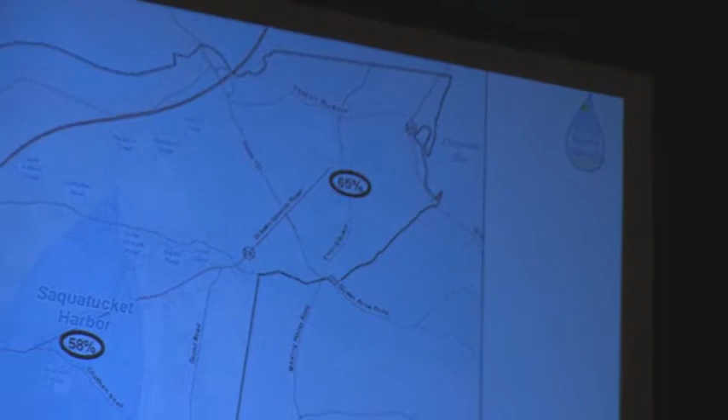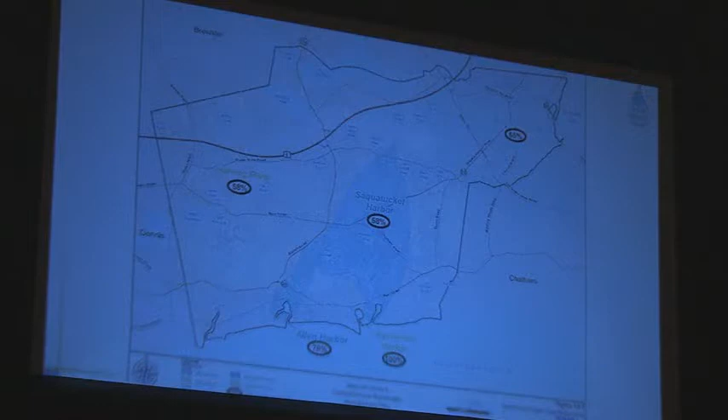I know at one of the homes I was in, I had a gentleman say to me, well, why are we doing this? Simply, we're doing this - putting the sewers in, by connecting into a sewer, the sewer facility in Chatham has the ability to remove as much nitrogen as needed to get us into compliance. So in a nutshell, we're doing the sewers in order to get to the level of compliance we need to protect the environment.

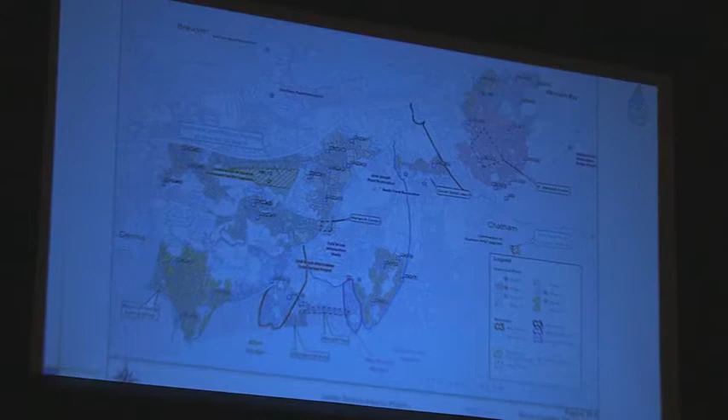But just to give you a flavor for the percentages we're dealing with, the next one is actually 8 phases over each 5 years, so it's 40 years in total. This is phase 2 in East Harwich. Phase 3 will also be in East Harwich.

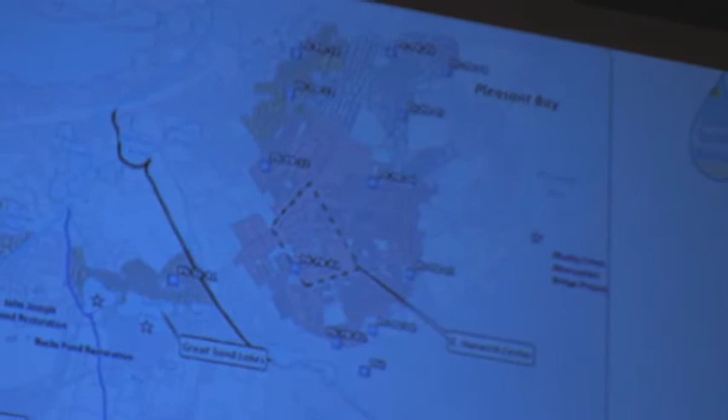This is the southern section of Pleasant Bay. In terms of materials we've passed out in the past, we have these maps, so if your property is on there, or if you're not sure about your property, please come see us, preferably one of the engineers, and we can make sure you know whether you are in the program or not. We did one of these presentations about 3 or 4 months ago, and a lady found out she wasn't in the program, so she left. I get it, we don't take any offense at that. Sometimes that happens.

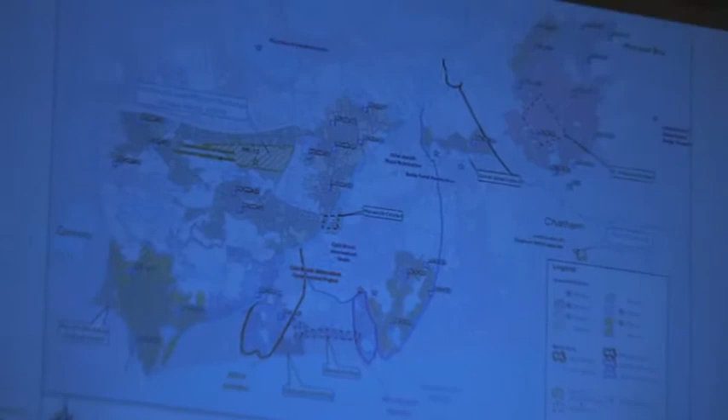This is the more detailed view of the area. The purple on the bottom is really Phase 2. I've said to people that as we do the designs on these, things are changing, so what you've seen in the past is more of a representation - this is much more specific. There are 650 properties included in this, shown on the screen. We do have materials with the maps and the list of properties, so again, if you're not sure, we have it.

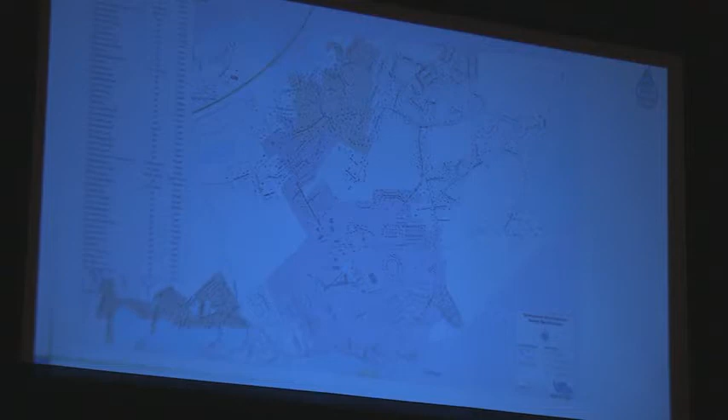Phase 3, which I was working on in the capital plan just the other night, is coming not that far off - 3 or 4 years. So we will be back to Phase 3. Phase 3 is next, and that is the central part of East Harwich as opposed to the southern section.

Just on the schedule, to remind folks, we've come a long way. Obviously we're already on to Phase 2 of the overall program. Town meeting had a construction vote on May 7th of 2018, and the town-wide ballot - thank you very much.

In order to get these projects done, we do need to do it as a debt exclusion. Just to remind folks, the debt exclusion only stays on for the length of the borrowing - once the borrowing is done, that falls off. That's an important concept because we're trying to make it cost-effective for people in the community.

To remind people on the cost elements, this year it will be about $150 to the average homeowner with a home of $350,000. That goes up, peaking at $650, and averages out over 70 years at $400. So $400 is generally what you'd see as part of your tax obligation on this component.

What we're gearing up for - one of the assumptions we made was that the borrowing would be at 2% through the State Revolving Loan Fund. It's basically a state bank, a good way to visualize it, but specifically targeted for water and wastewater. We are first on the list because we are addressing nitrogen and phosphorus issues, mostly nitrogen, and we are a regional effort - we're coordinating with the town of Chatham, so we're considered a regional application. That means we assumed it would be 2%, but there's a strong possibility it could be 0%, and they're even talking about loan forgiveness money. So being first in line, first in this process, will probably yield some benefits.

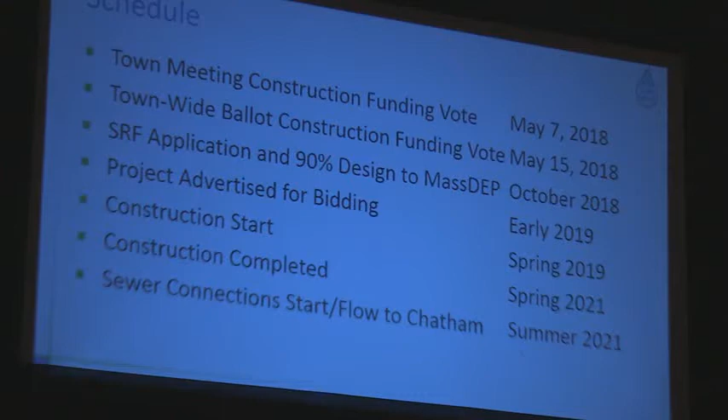We do hope that once we have the SRF application in and reach 90% design, we're getting close. We need to have that material into the state so they can do the review. We still have to be approved for the project, approved for what we're doing. You can see some of the boring work being done out there now - they're actually digging holes in the ground to get a profile of what's underneath the roadway.

What does it look like, so they know where to put the pipes? I think that's an important concept because we have engineering designs that talk about what it's going to look like and where the pipe's going to locate. Once they actually put the pipes in the ground, you'll have a more definitive answer. So the plan may say the pipe's 9 feet down, but when it's actually put in the ground it may be 9.5 or 10 feet. It's going to move a little bit.

So the plans you have are still going to be conceptual, really up until the point the work is actually done. Then when the as-built drawings are completed, we'll get the appropriate elevations, and that will be significant as we move on.

For folks, we hope to advertise the project in early 2019, with construction starting optimistically in spring of '19. One thing about working on Cape Cod, having been here for a little while now, is that usually in every other part of the state you do a lot of work in the summer.

On Cape Cod, we really don't do much work at all, just because of the tourist season. As administrator, to try to get the natural gas people out of the way, we've done some side streets to kind of keep them working so we don't tear up the roads too long. So there may be work done in certain sections so we can get the overall project moving in a timely fashion. The goal is to have the construction complete over those construction seasons.

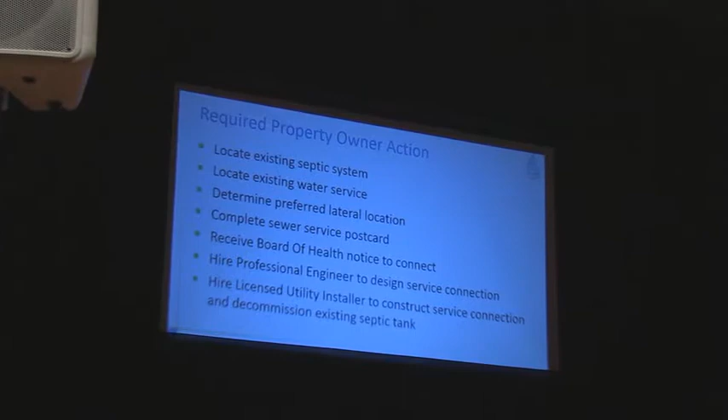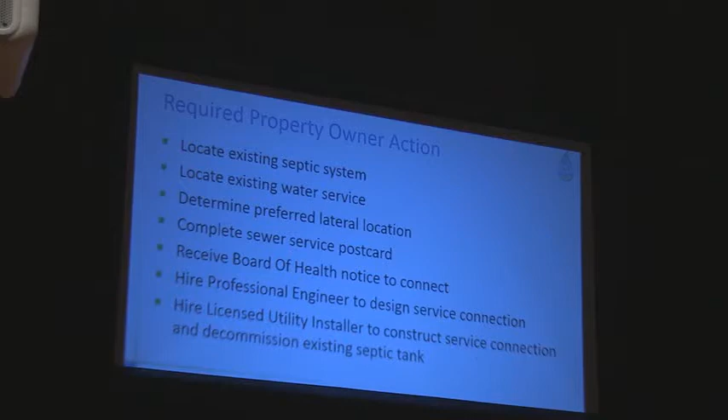The property owner requirements — what we're saying here, and we are going to have a presentation on this to walk through — is that you want to make sure you locate your existing septic system. You also want to locate your existing water service.

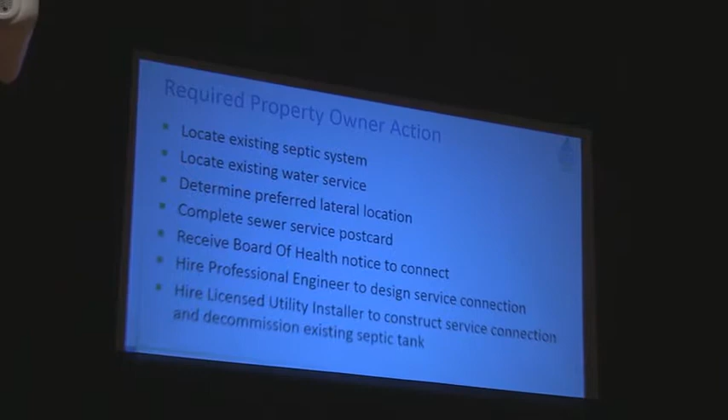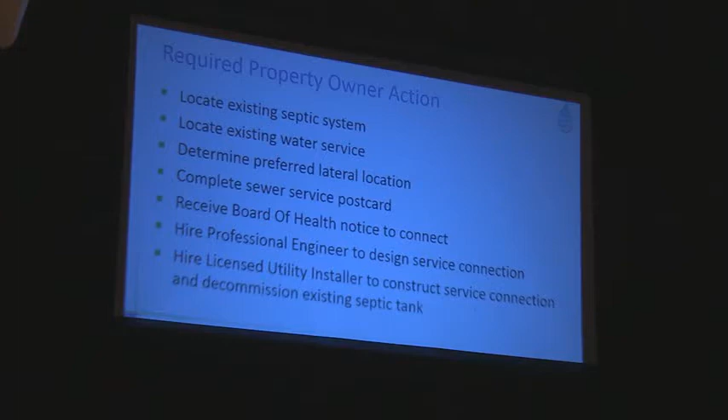I have had recent discussions with my conservation administrator. I would recommend that, depending upon where your current piping is, if you have wetlands on your property or close by to where your septic system is, you may have to go to the Conservation Commission as well. We are going to try to have the conservation administrator make some of those decisions, hopefully the vast majority.

But if the piping is going to go close to wetlands, there may be some additional regulatory approval that's needed. We are trying to streamline that process to the best of our ability, but there are going to be some cases where if you are close to wetlands and want to relocate your pipe close to those wetlands, additional approval is going to have to be obtained.

In terms of determining the preferred location, once you have all that information, you should be able to come up with a preferred lateral location. Just for terminology, the lateral is basically this: the town will put a pipe in the street, and we'll have what's called a lateral, a small pipe off of that. You would tell us approximately where you want that on your property or adjacent to it, so that if you know where your pipe is coming out, we can match it up.

The thing we don't want to have happen is to put a lateral in and have you change your plans and not be able to connect up in a straight shot, because that's going to cost you more money to run it an additional distance.

We will send out, and we would ask for, a complete sewer service postcard. As you get these requests, you'll most likely see the CDM logo on there. It will be a postcard that says we're going to come down your street, we want to talk to you about the location of the lateral. Do not throw the postcard away — this is one of those things. It's not junk mail. You want to keep that because it's important.

What that will do is generate a discussion between yourself and one of the engineering firm folks, who will come out and actually talk to you about where the lateral needs to go in your property, adjacent to your property. That's a key component, be it just a little simple postcard.

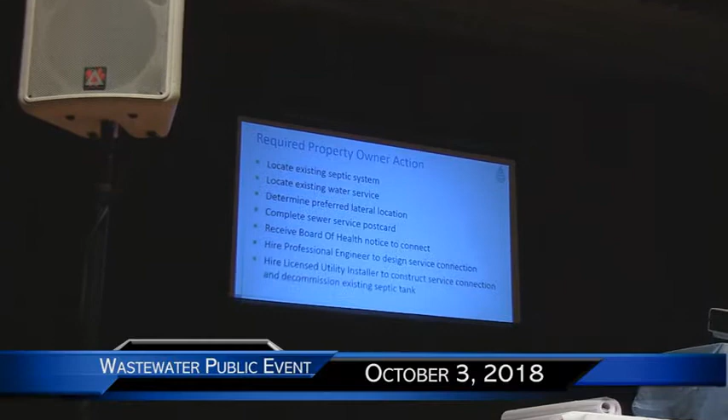So that's when you actually need to do the physical connection. But you won't get that till 2021. And under here, just for required property owner actions, at that point you could hire a professional engineer to design the service connection, and on the engineers, I think we have a listing at the health department of people who commonly design or do septic systems in the town of Harwich.

So we're not recommending anyone. All we're telling you is these are people that commonly have interactions with the health department that are familiar with Title V systems. I think it's probably a safe way to say that. And then you hire the licensed utility installer to construct. We will, through the Board of Health, put together a list of licensed utility installers.

If you want to get a sense for what that list may look like, the town of Chatham has 7 or 8 on their list now. We probably will start with their list as a place to start. So if you are dying to get a sense of who's in the marketplace, you could use the Chatham list, and the Board of Health will request to adopt a formal list of who is a licensed utility installer prior to the need to have a service done.

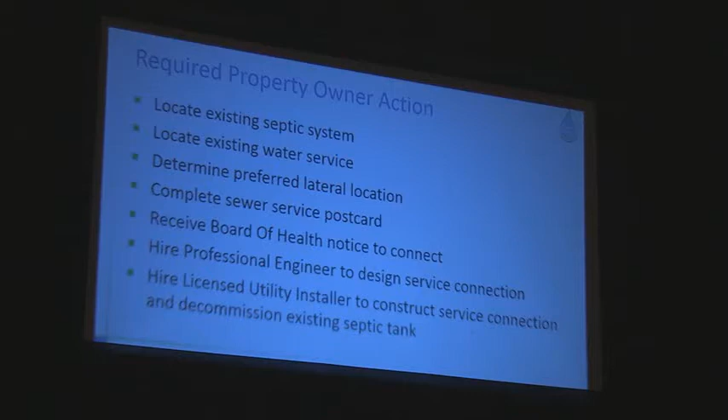And then just the resources available. We have obviously a lot of information on the town website. We wouldn't mind some feedback, we're trying to make that website as user-friendly as possible, so any suggestions are always welcome. Town staff, I know I personally have met with a fair number of people.

I've already introduced Dan and Megan, who have also met with people, so if you have questions or want one-on-one help because you have a specific concern, please take advantage of that.

I've introduced a few members of the Wastewater Support Committee. The committee meets twice a month, one in the evening and one during the morning on Tuesdays. The first Tuesday is the morning session, and the fourth Tuesday is the evening session, generally at 6 o'clock.

We also have email, so if people want to use that as a central way to get questions in about anything, go onto the website under the Wastewater Support Committee and you can send them an email.

On the septic system as-builts, we have those online. I think we're going to do a demonstration on that, so I'll leave that for the demonstration. We also have the topographic survey available for folks.

With that, hopefully not confusing you too much, I'd like to invite Dan and Megan up to do the pieces on the relevant question of how we actually do this.

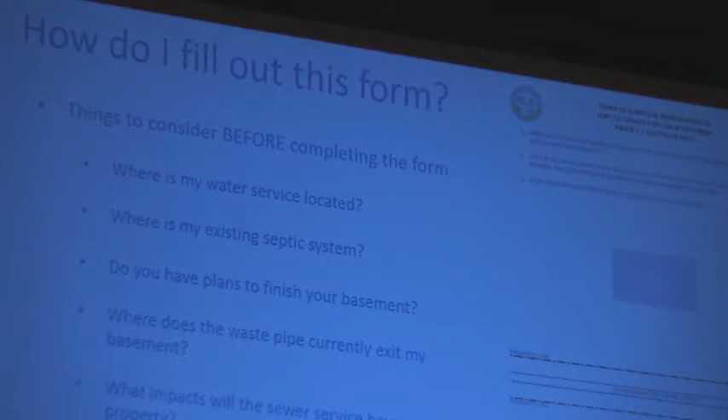Dan will go over water service information, and after we show you all of those things, we can talk about what you're going to do if you want to finish your basement or have a driveway, which way do you go with this. So we'll actually walk through how to look at your septic plan, your water tie, and help you fill out the form.

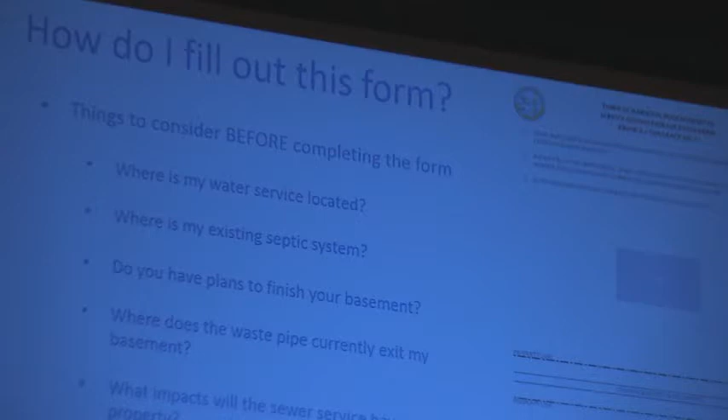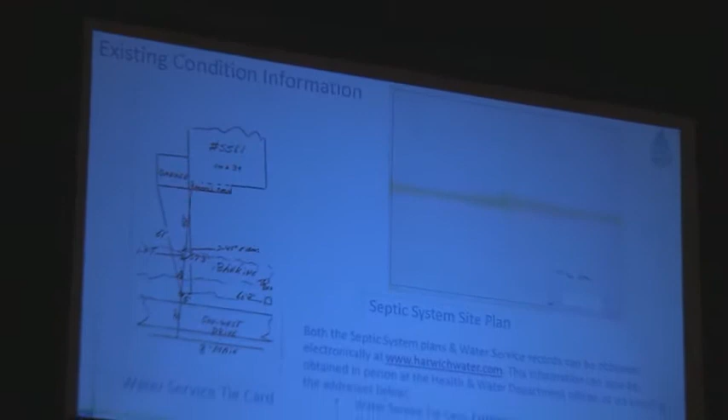Site plans and tie cards are now located at the Harwich Water website. It's on the Wastewater Support Committee site, linked directly to it. It's on the health site, directly linked. It's on the water site, directly linked. You can get them electronically.

These site plans are available for any property that the health department has a file for that's been scanned and uploaded. Larry, I don't know what to say - your file's not in there, not in our records anywhere. So there are a handful of records that we don't have anything for.

In that case, you don't have to hire an engineer to find and locate your existing septic system. What we can do is walk you through how to find your sewer line in your basement, and it will give you a sense of where your septic system is.

If your sewer line is going out your basement in the back of the foundation, you know your system is beyond that. If it's going out the front, you know your system's in the front. Beyond that information, you don't really need to know much more at this point. When you do go to that next step of hiring the engineer to connect the lateral, they'll be able to find that information out, so your utility installer will know where to abandon a tank or cesspool.

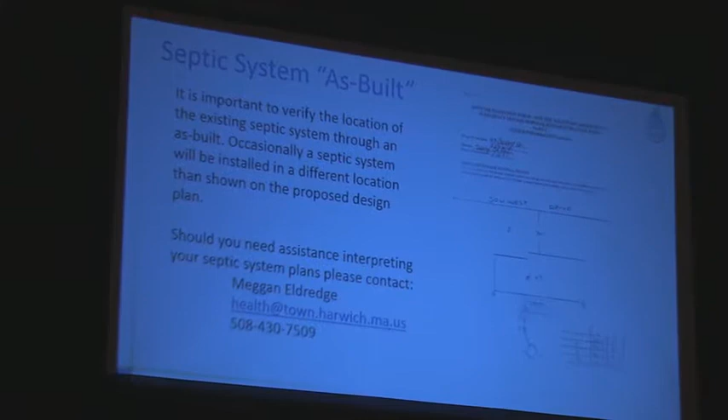A septic system as-built is a little different than a site plan. A site plan has your property lines, your house, and sometimes shows a proposed water line, driveways, even some get detailed enough to show trees. But the septic system as-built is a basic drawing that your installer gave us when they installed the septic system.

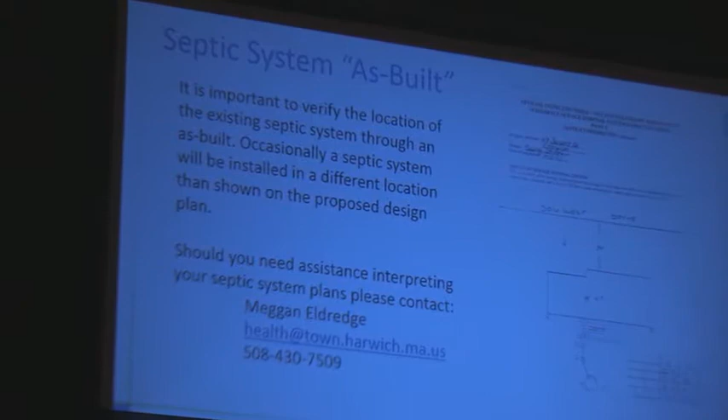And it has swing ties, and a lot of people don't know what swing ties are. If you look at this as-built, it's hard to see up there, but it's on page 18.

We use 47 Southwest Drive, and I know that person's here, so lucky you. Does that mean I connect for nothing? Yes.

So if you look at this drawing, you'll see Southwest Drive at the top of the page, so you're looking at the septic system in the back of the house, and there's a little tiny A and a little tiny B at the corners.

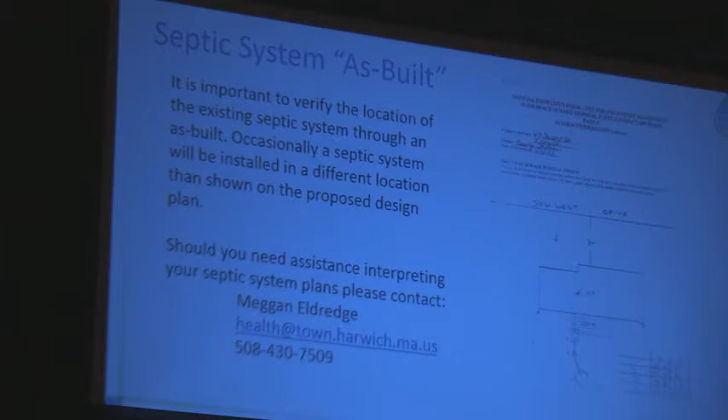And then you'll see a deck in a rectangle with a 1 and a 2. So what a swing tie means is where one tape measure reaches from A to point 1 and B to point 1, and that's the measurement given in the little table.

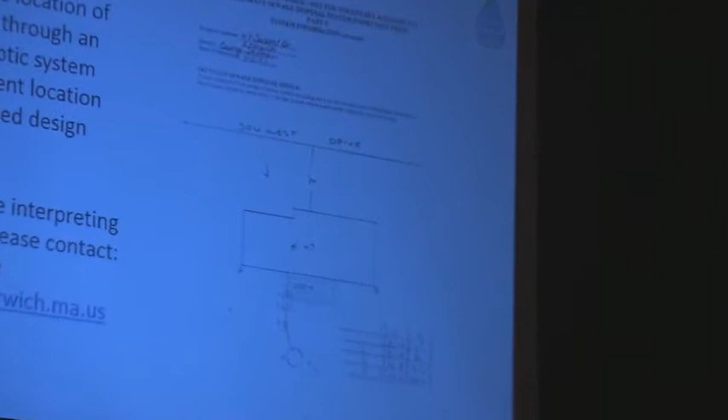What's important to see is sometimes an as-built is a little different than your actual site plan. Especially pre-1980, a lot of times an installer would get in your backyard and say, there's a giant tree over here where the engineer wanted to put your septic system, so we're going to put it on the other side instead.

So it's important not only to look at your site plan, but mostly to look at your as-built. A lot of site plans are going to look like this, but a lot of them are much more basic, and some are a lot more clear. So they vary from hard to read to crystal clear.

What you're looking for when you see your site plan is where your house is in relation to the road and where your septic system is in relation to your house. That information is going to help you decide which side of the house to go out with your lateral. Do you have a deck? Do you have all of these other things that are going to get in the way of the fastest and easiest way for your lateral to connect?

And Dan gets to talk about water service size.

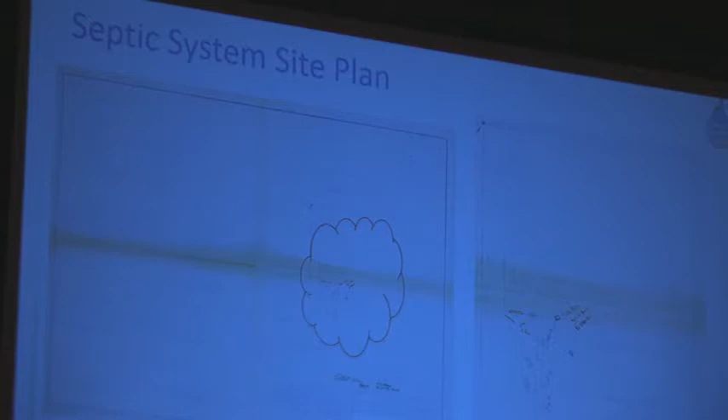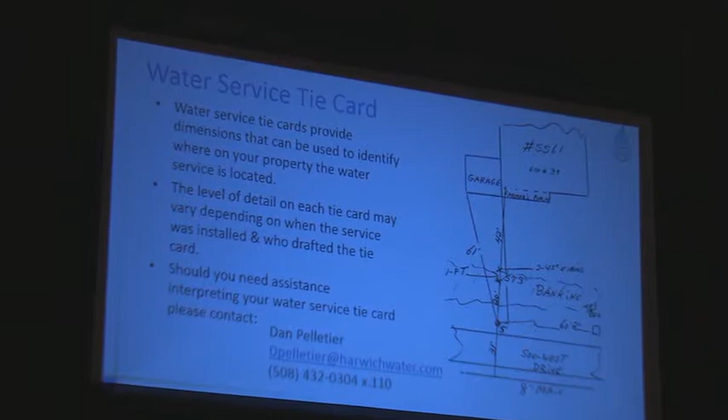So we're going to go through water service ties, and I have a number of examples at the end of this as to what your water service tie card may look like. There's a good chance that it was formed on the outside of your property next to a trench on the back of a pickup truck.

Nowadays, we do them all in AutoCAD, so you know they're crystal clear. So we're going to go through an example here of 47 Southwest, and you can see on the picture that there's a lot of lines and numbers, right? What I want to do tonight is try to provide the know-how to understand what we're looking at. So I guess we'll move on to the next slide.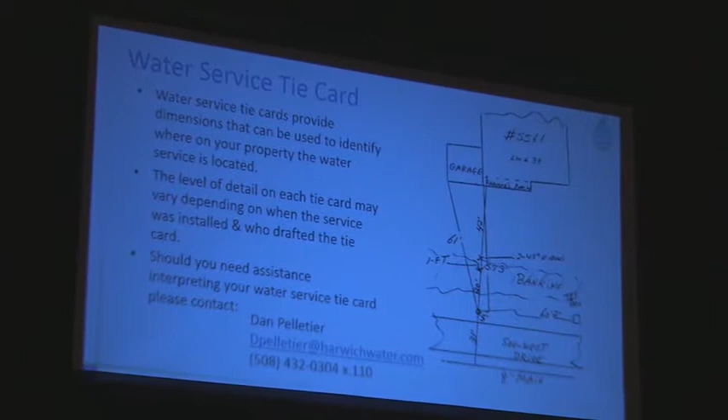And first, I apologize. First, let's find out how to get it if you don't have it already. So we have uploaded, as Megan said, all of the water tie cards and all of the sewer or septic system as-built and plans, and they're all available electronically on the water department's website.

So if you go to the harwichwater.com homepage, what's circled in that little bubble right there says Department News Plans for Phase 2. And there's a link for water plans and there's a link for sewer plans. They both take you through essentially the same process, but we're going to go through both so that you can see it, and hopefully it'll sink in, you can take it with you.

So on the next slide, right next to that red arrow is step 1. Step 1 says to find your water account number. That's going to take you to the spreadsheet on the right, which is going to have all of your addresses. It's all alphabetical by street name and number, and you're going to get your 5-digit water account number.

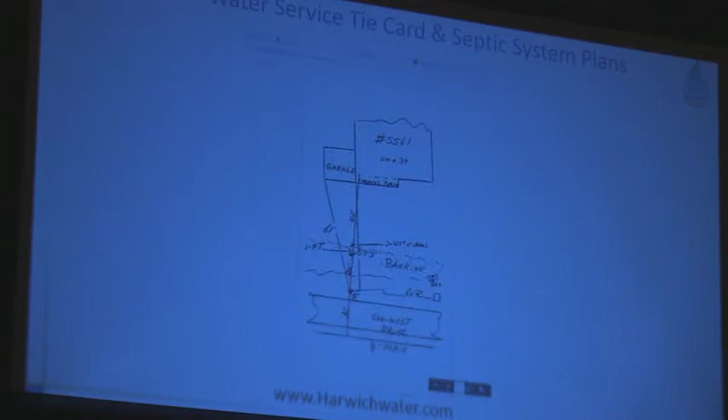You are then going to go back to the previous page and click next — I'm sorry, you're going to go forward. And then the link just below that is step 2. Step 2 is going to link you to the web page on the right, and you're going to scroll down and find that 5-digit account number, at which point you will click that, and it will pull up your service tie card. At that point, you can then print that, leave it online, do whatever you'd like with it.

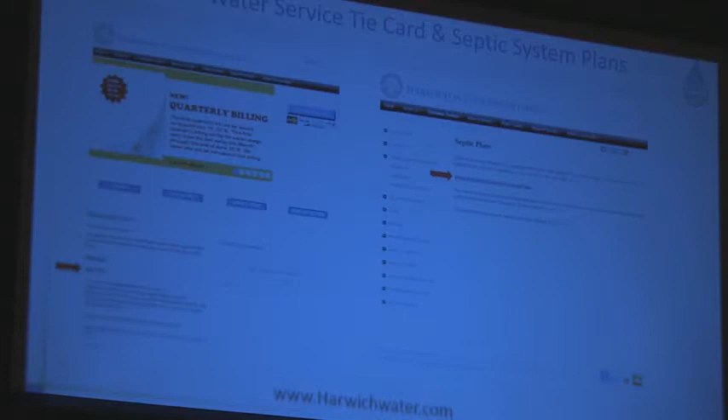Moving on to the next slide, we're going to go through the same kind of process with obtaining your septic plan.

So again, you're going to click the septic plans link. It's going to link you to another page, and you're going to click the following link on the right with the arrows, so hopefully you can take this document with you and guide yourself through the process at home.

And this is assembled by address. So in this instance, you will be looking for just your property address. Again, it will pull you to the as-built or the septic plan, and you can save that, print that, do with it what you'd like.

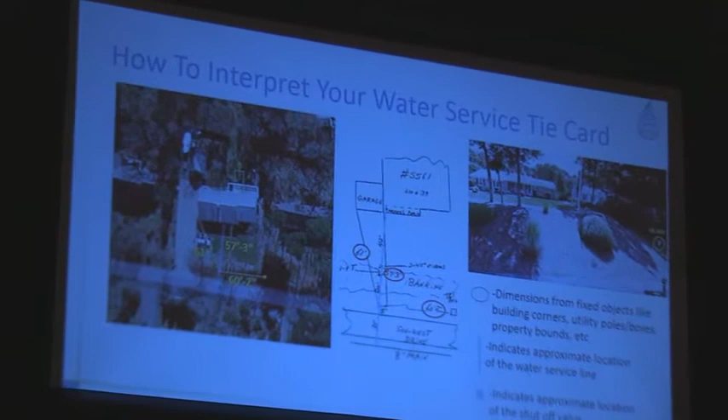So to the next step, we have our ties, we have our septic plan, we have our water tie. Now, what are we going to do with it? This slide goes through how to interpret your water tie card, because as I mentioned earlier, they were likely done on the back of a pickup truck, and there's a lot of lines and a lot of numbers. Some of them are much clearer, but the one for the demonstration tonight was a little bit complicated. I think that's a good thing, so we're giving you a real situation.

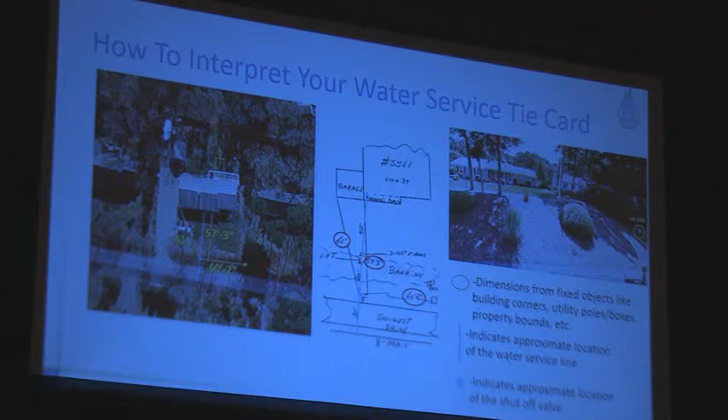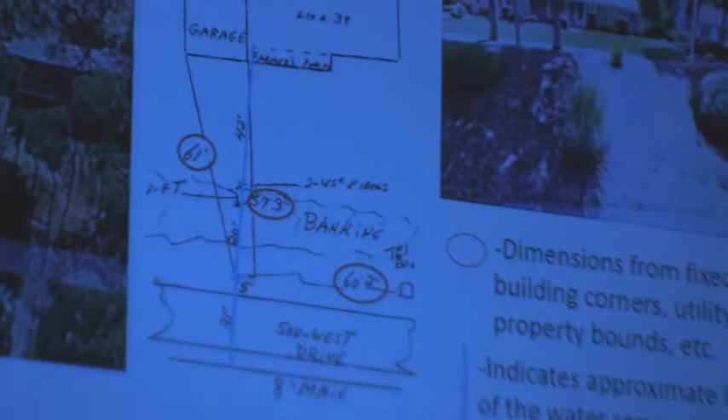So what I did with the image in the middle was highlight the water line in blue. And the dimensions circled in red are the dimensions that you can pull with a tape from the corner of your house to locate where the curb stop is on your property. The curb stop is the shutoff valve at your property line. You can use these tie cards to locate that service box in the front of your property, and from there you can make sure your sewer stub is going to be 10 feet or beyond that pipe.

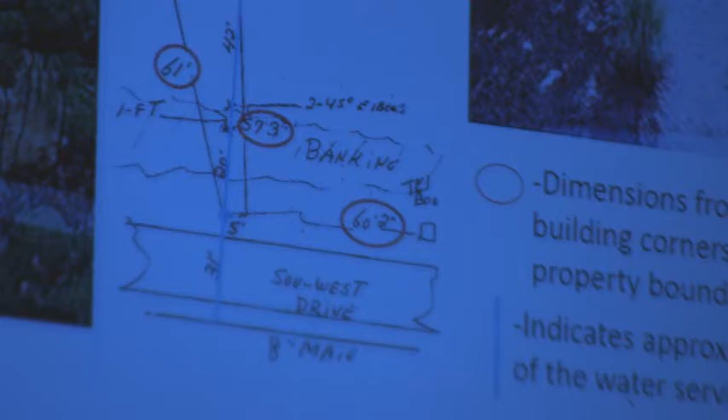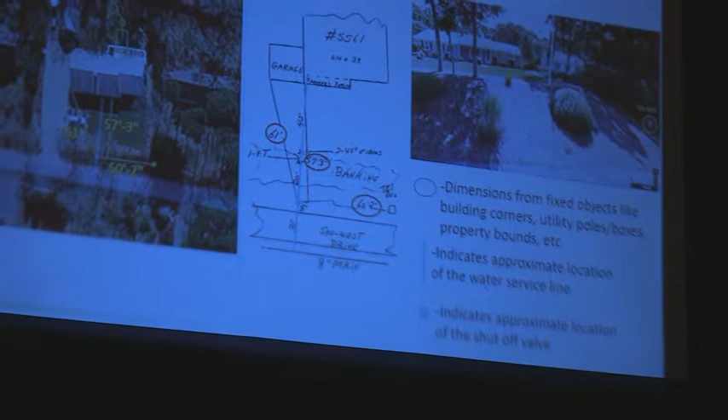For this property, I also took that and we put the water service as well as the septic. It's kind of difficult to see there using Google Earth, just so you could see what it would look like in real life. If you look at the dimension on the bottom right, that 60 feet 2 inches, you can see it's right next to a little square box. It says TEL box, which is a telephone box.

So I actually went and took a Google Street View of that home, and you can see circled in yellow on the right image is the telephone box. So if you get the service tie and look at your property, you say okay, that's the telephone box. Or a lot of times they'll use a catch basin or a telephone pole, and they generally write the pole number on the tie card. So when you download your tie cards, you can look at that. Some of it may be as easy as just pulling from the corners of the house, but sometimes they used other landmarks.

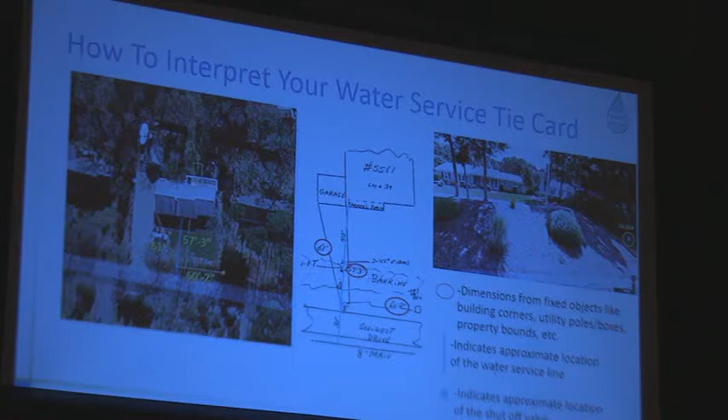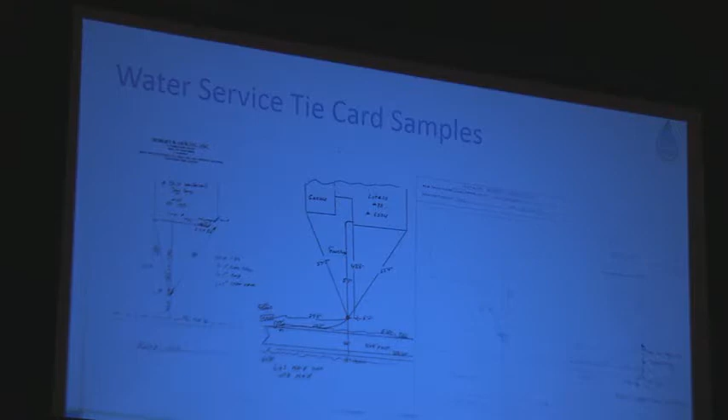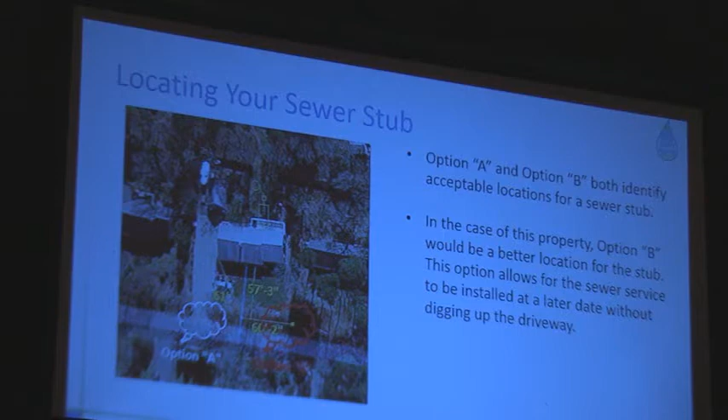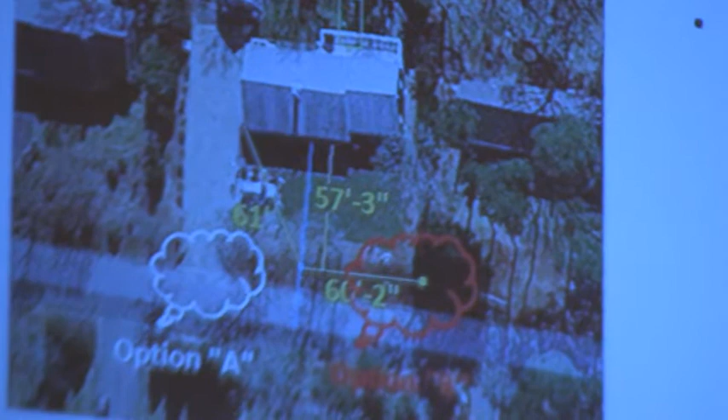But now going into how are we going to locate, how are we going to use this information to locate where we want our stub. If you look at the information we gathered from the plan, we know our septic system is in the back and the water service is going down the front center of the property. Now option A and option B would both work, but option B is much more lucrative. It would not require restoring the driveway, it wouldn't require trenching between that tight space between the garage and the house, and putting it in option B allows the homeowner to come to the right side of the house and down a mulched flower bed and not disrupt their lawn.

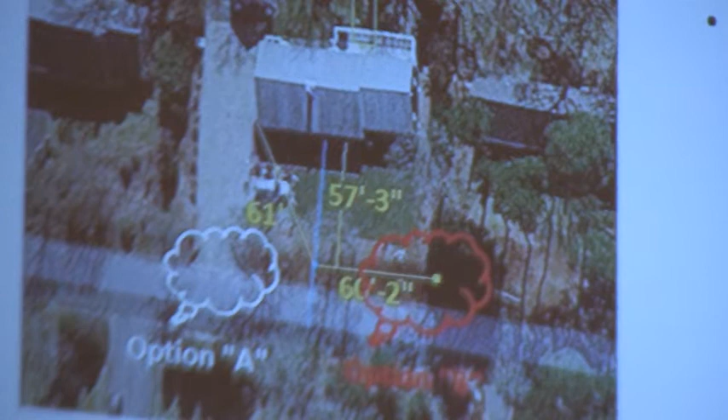So looking at this information, you can see at this point in time, all you're doing is trying to identify where in your frontage is going to provide the least impact when you go to do the actual connection from your home to the street. So that's kind of a quick walkthrough of this property, and the lucky winner here tonight.

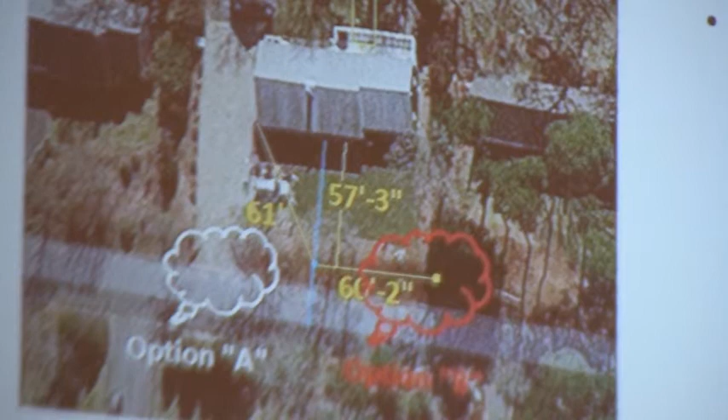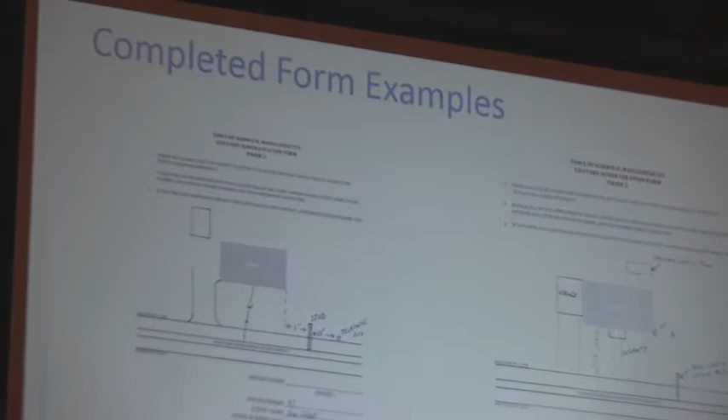That wasn't planned, but the next slide is actually what these completed forms should look like. So the form on the left is what I drafted for the property at Southwest that we just went through. You can see it's a very generic drawing, there's a square and a street.

What they're looking for you to do is just identify where on the frontage with some way to identify where that stub should get placed. So this image on the left, you can see I drew that telephone box back in, and I put a dimension 15 feet off of that telephone box. Now, keep in mind, the dimension to the water line was 60 feet, so we far exceed our 10-foot minimum. We're going to be on the edge of the property, and it's going to be able to go up the mulch bed and connect right into the back. And you have a completed sewer service connection form. Another example was one that we did for another presentation on the right.

Again, the dimension that we provided there was, it's difficult to see because of the projector, but it's 10 feet off of the right side of that home. So just some dimensions or some indication if you have trees.

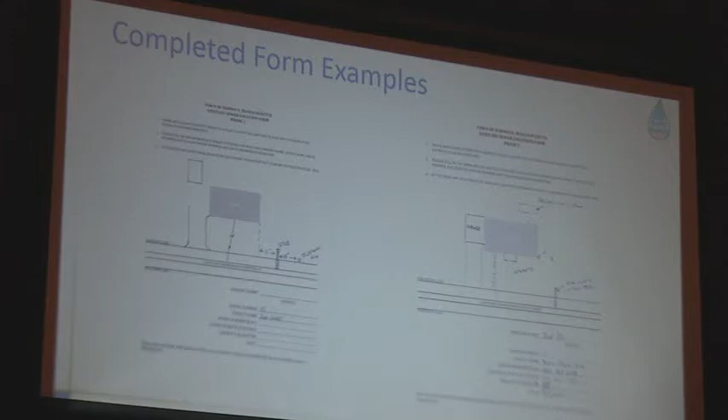I went out to a home today and assisted a woman with locating her water service and providing some direction that would have the least impact on her property for where to put the sewer stub. She has very large pine trees along the front of the road, so one way we identified the location was, here's the water service box, we have two big pine trees, and I want it right in the middle between those trees.

It can be, I believe, correct me if I'm wrong Dave, as simple as saying we need it at this point, show me the driveway, show me what's on your property. It doesn't have to be an engineered plan at this point, it doesn't have to be anything more than that. So, do we not have to hire a civil engineer, or can we hire a civil engineer?

At this point in time, you do not have to hire one. The question was whether we have to hire an engineer to perform this function. You do not need to hire an engineer to complete this form.

When you receive the order to hook up from the Board of Health is the point where you would need to consult with an engineer to design the connection from the end of that pipe into your home. So if your septic's in the back at a lower grade, what you need is, you just can't... how do you determine if you're going to need to?

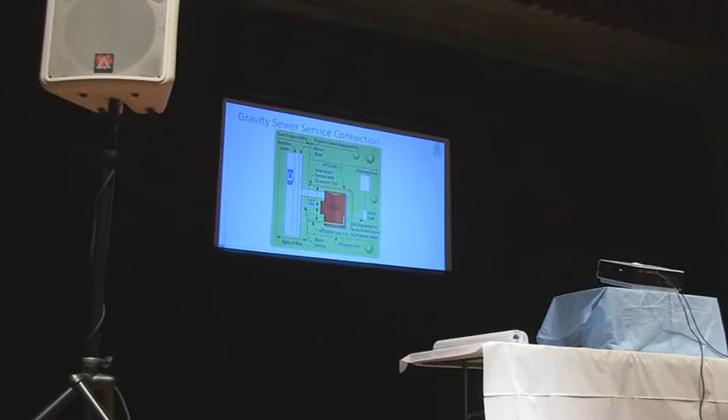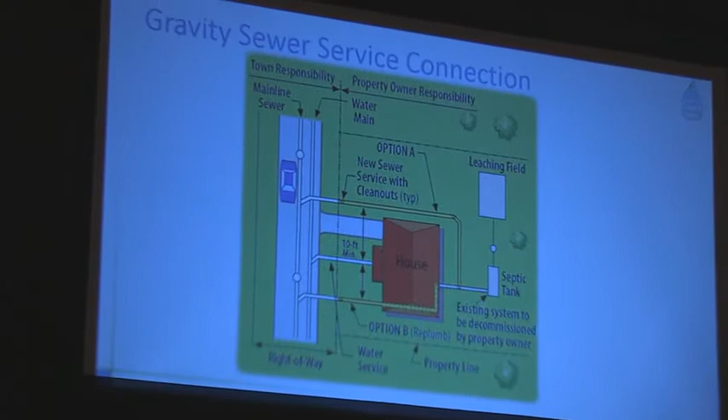Some of these plans I have looked at with folks will have the elevations on them, to give you a sense. I think most of the pipe in the street is going to be 8 to 10 feet down, so as a reference point, 8 to 10 feet below the road grade is approximately where the pipe's going. Then, depending on the elevation where your pipe is coming out of the back of your house, those would be the two numbers you'd want to compare.

Well, 2 feet can be a big difference, whether it's 10 or 8, you know?

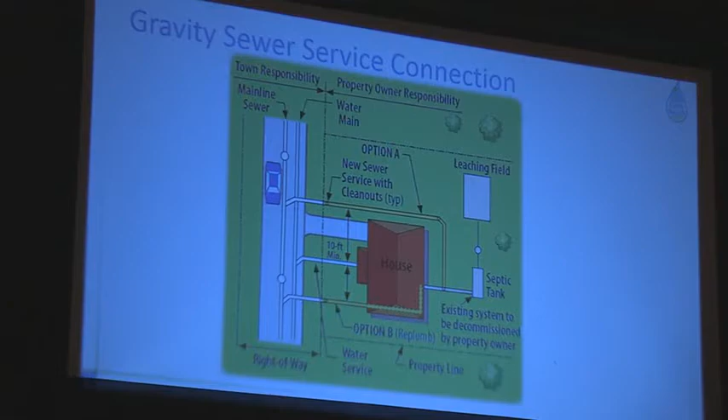One of the things they did during this design process was go out and shoot the sill elevations of all of the homes. Right, and I believe you assume 3 or 4 feet where it comes out below the sill? We typically design the sewer in the street to be roughly 10 feet below the sill elevation for each property.

Can't always accomplish that. If your exit is coming out the back of your house 3 feet from the top of the sill, you should be good then? Correct, no matter what side of your property is on. What's the sill you're talking about? The sill is the top of the concrete in your foundation. That's what I thought. Yeah, double check—the foundation, then there's what they call a sill board, and then the wood.

Are you, before we go on, are you satisfied? Just, something's got to determine what the elevations are, because my property slopes down here, you know what I mean? I know it comes out the back here, but it slopes down, so I don't know if I gotta go out the front or not.

And look, there are definitely situations that are unique, and I have been to a couple of them already—a couple of trees in the front yard.